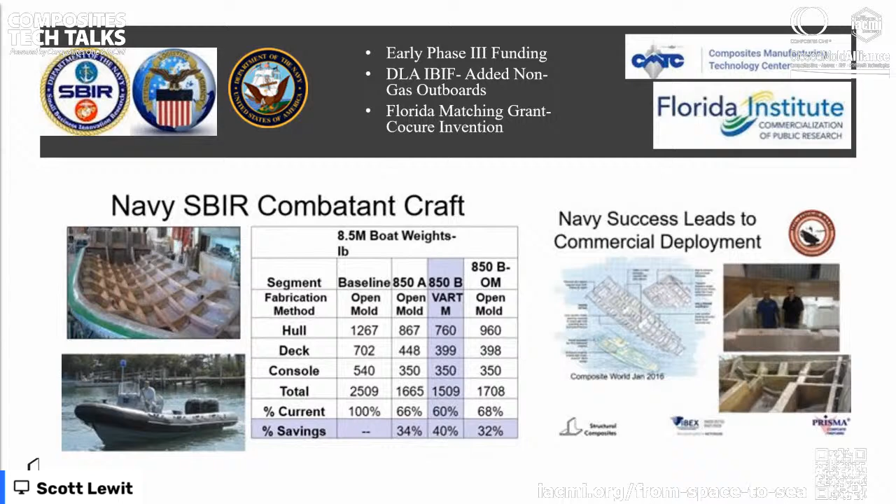So we're down this path and got fortunate — we got some money out of some Phase 3 funding right at the end of Phase 1, before we got our Phase 2, from the Navy Composites Center out here. At that time, they were just coming out with these alternate fuel outboards — early Mercury JP fuel engines. You can't have gasoline on a ship, it's too dangerous, so we'd been stuck with heavy diesels. Back in 2012, when we did this, it was the birth of the outboard heavy fuel engines that you'll later see in our RIB that we took to deployment with the Navy.

But the weight really attracted a lot of attention, and we had some early commercialization — you've seen that maybe with Hydrosport, where they took this skeleton design and used it in their 53 and 65. We didn't want to do the suspended deck on a boat that big, but we did use that skeleton design and landed a conventional stringer system on it, which made that boat very light. The Hydrosport 53 without engines weighs about the same as the 42 without engines, to give you a feel for the weight savings. And it costs more too.

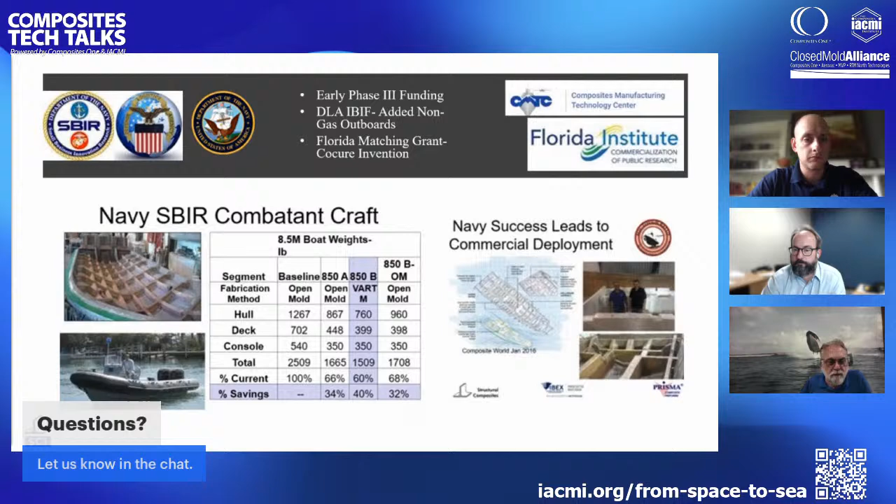So on the journey, we'll go through the inventions we made, in particular CoCure. We were able to really rack up a lot of awards, which was helpful — if you've been to the trade shows, we're there. These helped grow the buzz about the technology and started helping on another mission we've been pushing for a long time: not to be dependent on just the marine market. We want to be in other markets — it's been a long-term goal of the company, just because the boating industry's cycles are pretty deep, and I'm predicting we're probably coming into one here with gas prices where they are.

When you look at these other markets and the material acceptance — this is a little old data, from Lucintel in 2012, I think, but I don't think it's changed tremendously — the marine market is about 68% penetrated with composites, so it's a very accepted material with no barriers to its use. When you look at transportation, though, it's about 4% penetrated with composites. Construction is also about 4% penetrated. So there's very little market penetration there.

What makes this really impactful is when you look at the size of the markets. The marine market is $500 million, and that's 68% penetrated. Well, the transportation market is over 5 times the size of the marine market and only 4% penetrated. The construction market is about 7 times the size of the composite marine market and also only 4% penetrated. So it really helped us focus our mission at the company: do I want to make this 68% into 75%, or would I be better serving the world if I can make 4% into 8%?

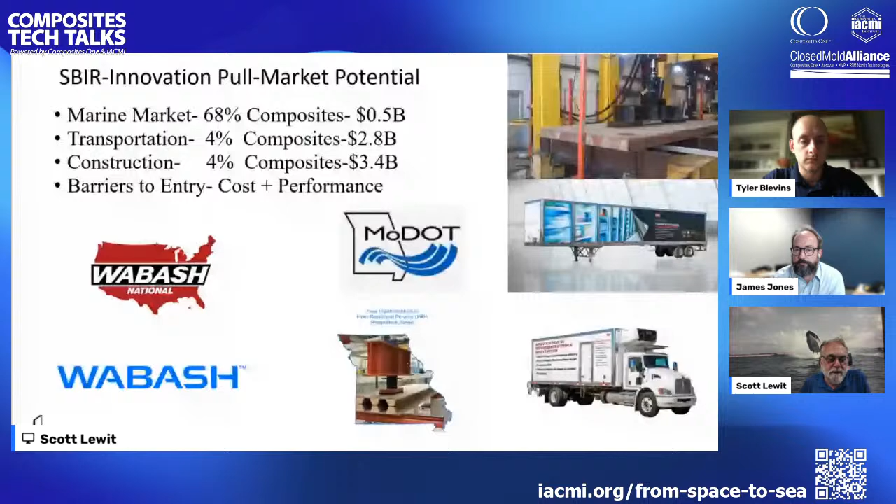So as we talk about these other markets, the kind of jive of what we're trying to do is we're trying to use the marine market as our technology development bed, and then use these bigger markets to upscale it even better and drive technology to deployment, right? And then bring it back around for the military.

As you could imagine, these are shock mitigating boats, so the boat's moving a whole bunch. There's a lot of motion. It's really like gel coat's worst nightmare. Gel coat's really brittle. Boats are designed around the gel coat. Gel coat's elongation is about 1.5%.

Our cheap resins stretch to 2.5%. Our high performance vinyl ester resins are 4 or 5%. We're not making the use of the materials that we could because of the coatings. Now you make a shock mitigating boat that flexes, and the coatings really aren't going to work.

So I started on the journey back in 2009 with this, looking at polyureas. And if you remember, we were doing something called shark skin, and I was looking at Line X, things like this to replace gel coat, and discovered its real Achilles heel is it's too flexible. And when it's so flexible like that, you get any kind of damage to it, it hydrodynamically peels.

So I was right in my phase 1 going, I got a problem. And fortunately, we had gotten some extra money from the state of Florida - they had an SBIR Plus program that gave us some extra money. And I started playing with this marriage of polyester and polyurethane, and just literally stumbled onto this compatibility that I could take certain polyurethanes and certain polyesters and just literally mix them together, and they cure into a new material. And it was really cool.

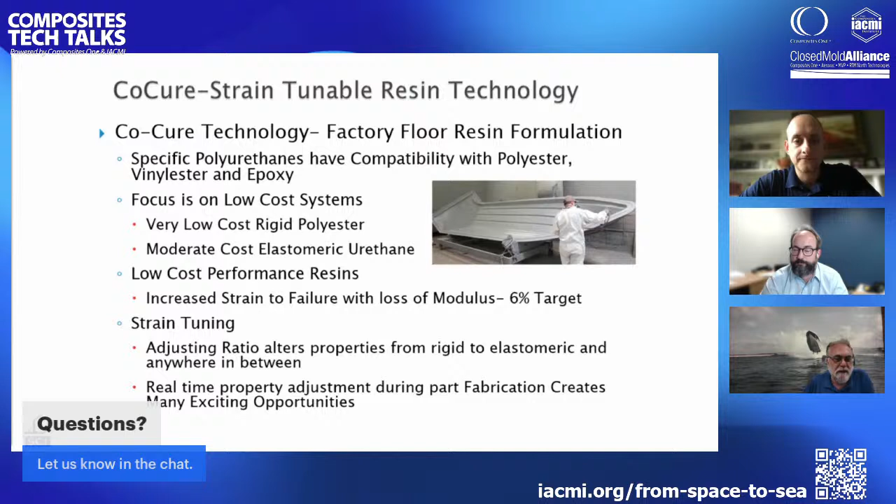So as we're doing this, Wabash is in here looking for the next big thing. And then when they kicked in for CoCure, they bought in before it was even patent pending - it's patented now. Now all of a sudden the supply chain's falling all over themselves. Okay, what can we do for you? How much can we give? So millions and millions of dollars of product development, and the result is the finished product.

There it is. So here's CoCure, and CoCure is really simple, right? It's your polyester resin, or gel coat or adhesive, whatever you want, or putty, with its catalyst, and we're combining it with the A side and a B side polyurethane. They're all optimized to work with each other. But what's amazing about this is this entire profile is possible by just the blend of these 4 chemicals.

So we're doing the chemistry, we're doing resin formulation on the factory floor and making radical changes in properties, and we're just changing ratios here. So here's the MVP gun that's set up for CoCure, and you can kind of see it's got your regular resin pump, it's got a catalyst pump, but it's got this big old slave arm system, and that's your polyurethane A and B side.

So they've now got a 4-component gun that lets us change the ratio of any of these components. When we started on our journey, it was like, oh, elongation, that's what we're after. So we learned, okay, we got stretchy urethane and rigid polyester, and if we put more stretchy stuff in, it gets stretchier. This is one of the early curves from a couple years ago.

So we're really sophisticated here. If we say CoCure 20, that's 20% urethane content, meaning 20% of the constituents are the A and B chemical. If you go to CoCure 0, that's gel coat today with about a 1.4% elongation. Nothing much happens till you get to about 15% urethane.

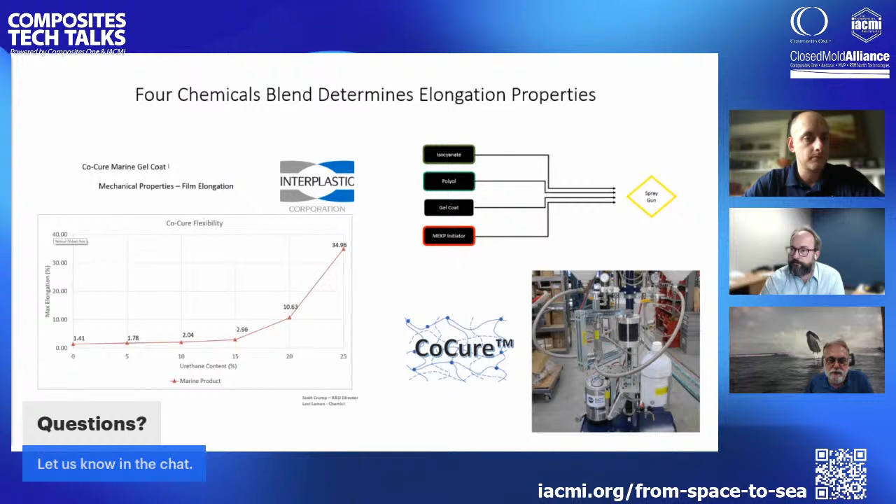While polyurethanes are really small, teeny little molecules, and they grow by chain extension. When we mix them together, we're getting this hybridization between cross-linking and chain extension. You can really see it's not linear, it's very non-linear behavior where all of a sudden it just really goes. And I didn't mention, now we're doing stuff at CoCure 50, 60, 70, and it's pretty cool. At that point, you can really feel it tactilely - it's much more elongation, up around 100% elongation.

And so what are you going to do with it? Well, like here - now if I can change my properties ply by ply or spatially in the case of a coating, do I want the same coating properties on my leading edge or my trailing edge? Do I want the same bottom properties where I'm going to run aground, or on the top? Do I want more abrasion resistance? Do I want more impact resistance? Same thing - now I can kind of dial this stuff in and out, and that's the coating side.

But then on the resin side, there's a game to be had too, because I've got glass fibers, carbon fibers, plastic fibers, and I use the same resin with all the fibers. Well, gee, maybe what if I'm changing my resin properties as I'm changing fibers? And what if I'm changing fiber location and resin properties? So you start to get the idea.

There's a lot of dimensions here that, from a science point of view, this is kind of fun, because it's like 3D chess, right? You've got a lot of new things you could do that you couldn't do before. And sometimes, especially with materials, as we talk about hybrid composites, marrying materials with really different moduluses and stiffnesses creates really good damping and noise reduction, and some opportunities in addition to lightweighting.

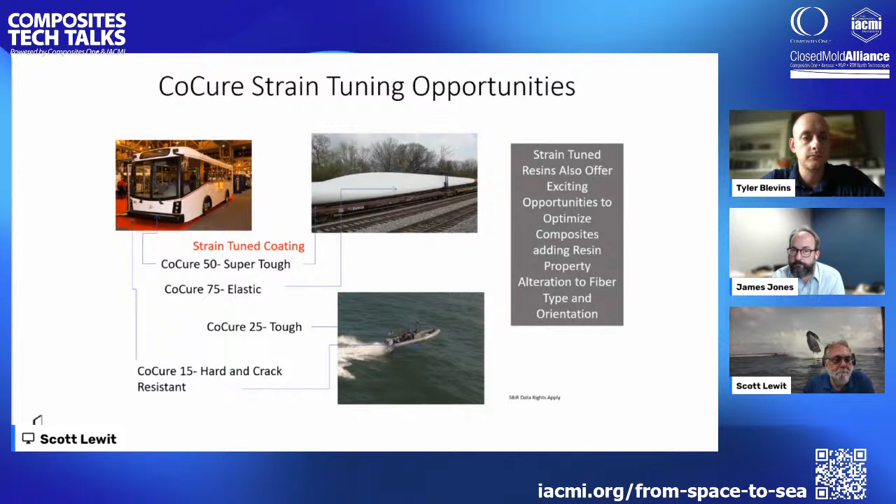Okay, and yeah, better to be lucky than smart, my lawyer always says. So it's just like, it's great - the more urethane you put in, the better the stuff gets.

This is CoCure 15, and you can see in abrasion it's about double. If I go to CoCure 50, it's 10 times the abrasion resistance of gel coat. 10 times. Okay.

CoCure 15 has about double the weathering of regular gel coat, gloss retention, color retention. And again, that goes up because you're pulling styrene out, putting polyurethane in, which doesn't weather like the styrene does. And even at CoCure 10, 15, you're a low HAP material. So it's kind of neat. It bridges the EPA guidelines.

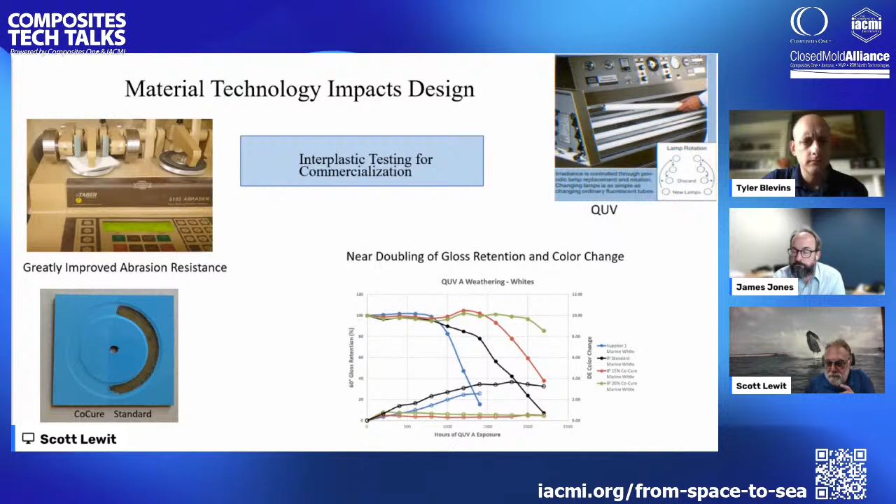The other thing we're really lucky on too is polyurethanes have, the A side is kind of nasty. The A side of polyurethanes has a lot of potential environmental health consequences. And it turns out the levels we're using, the amount of ISO, the A side, is so small that all the testing done at numerous factories now, it's undetectable. So you're getting the low HAP and you're getting low ISO. That was really fortunate for us.

Okay, so at the seminar I'm going to talk a little more about business models, so I'll leave a bit of that for the session. But I wasn't happy with the business model, so we created our own business model, and we'll talk about it. It's a technology sharing model, and Wabash is a part of that.

Without getting too much into it, Wabash joined the company, became equity partners, and now technology we develop only can go to them. They are exclusive in their market segment. We can't deliver our technology to anybody else. But as we develop technology together, we're free to take the technology to other non-reserve markets.

And so there's this whole new story of technology sharing, technology collaboration. A good example are the aerospace companies. Boeing's got a lot of patents, Lockheed's got a lot of patents, and Boeing's patents are to keep Lockheed from doing stuff, and Lockheed's patents are to keep Boeing from doing stuff. But if I could take a Boeing patent and make a semi-trailer 30% more aerodynamic, does Boeing care?

So there's all this IP that's defensive IP, and if we could figure out how to tap it, it could do good not only for the company, but for a lot of other things, good for our country. So in the business model, I stole a lot from the Navy Composite Center, which I've been working with for 25 years, in their collaboration models.

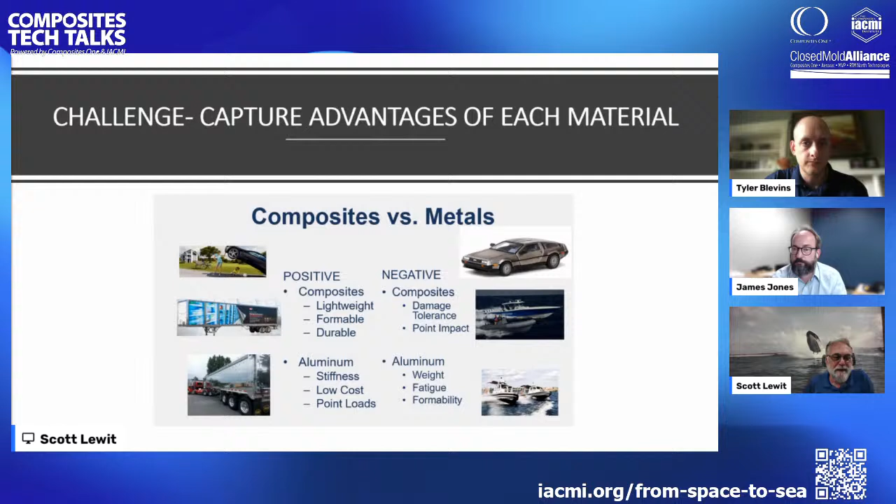And we made a discovery again with CoCure. What we're trying to do is get rid of the negatives of each material and stress the positives. We discovered that the CoCure, by changing that formulation again, we can change it from a coating to an adhesive. And by making it change from not stick to stick, it can really stick.

So we can spray it right onto metal surfaces, just like we'd spray gel coat, but now it's an adhesive coating. We spray it on the metal, and then just like laminating to gel coat, you laminate on the metal. That's it. It's just that simple.

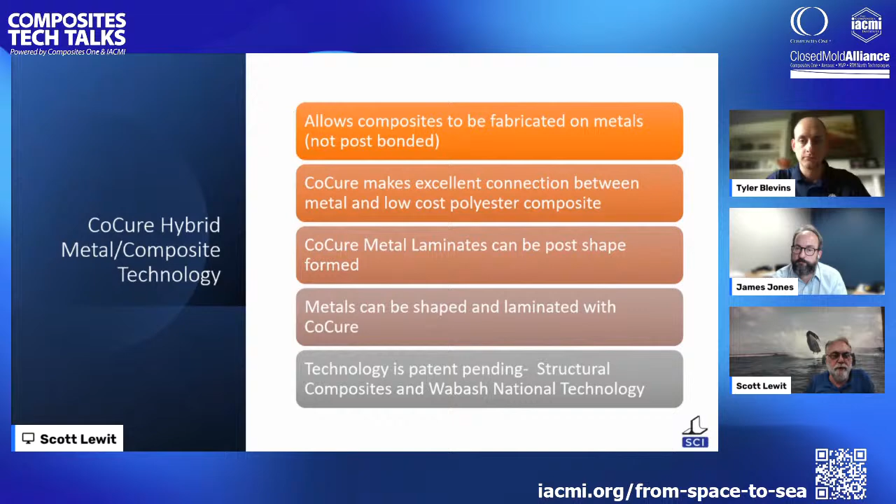You can kind of see here some of the first pieces we made. This was with a methacrylate, it popped off. This is the hybrid metal one, and it bent - it took shape. And we went, oh. Me and Travis from Wabash, we were doing the Snoopy dance, because it was like, wow, automotive.

We could stamp this stuff out. We're going to change the world.

This is what we needed for Wabash too, because metals give a lot of toughness. They give a lot of point load. They give a lot of modulus. Modulus stiffness is expensive for composites. Glass is not a stiff material. Carbon's a very stiff material, but it's 10, 20 times the cost of glass.

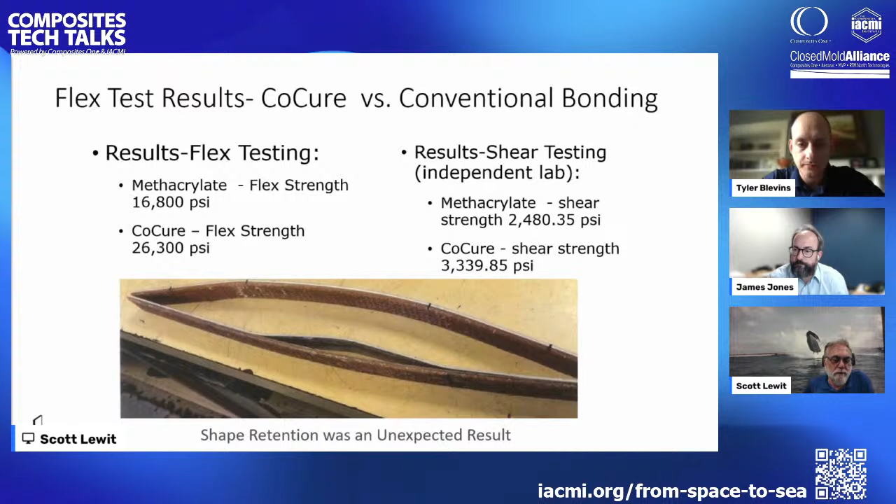Aluminum, we can buy at $2 a pound, and it's got a 10 million modulus. So we can use aluminum just for its stiffness. We can use it to replace things like carbon and be very cost effective. In this case, we're doing semi-trailer floors. So in Wabash's rapid innovation process, we went in about 7 months from idea to deployment.

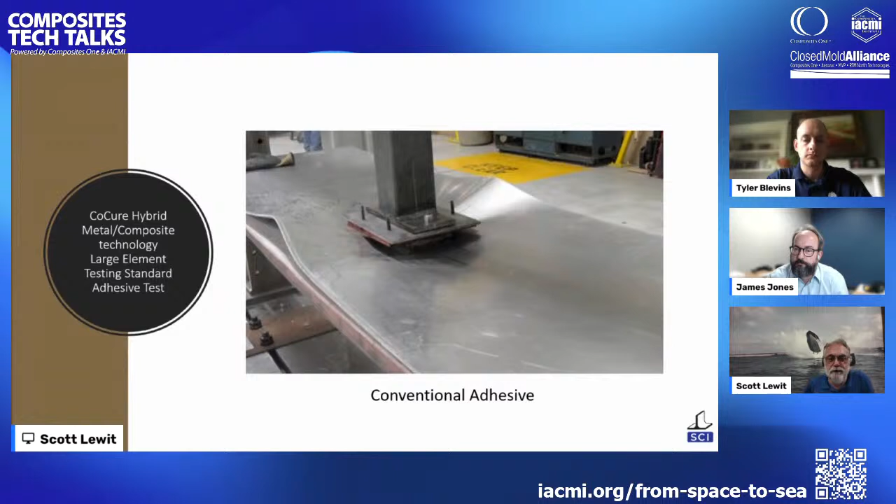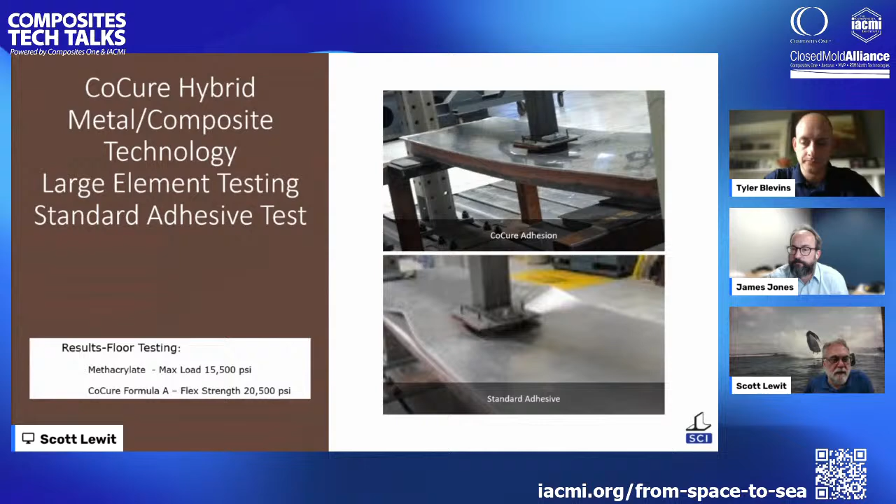Here you'll see larger scale tests we did on a floor section with conventional adhesive, and then with CoCure, we're punching through it and getting better loads. From there, we got permission to build a prototype, which they full scale tested. This is something they would never, ever do before: pick an unmanufactured floor up by the ends. This was amazing to them, that it wouldn't just buckle without the walls sitting there.

Hey Scott, so I got a question that we've got presented to us. As a reinforcement resin, are the processing properties, gel time, viscosity, et cetera, suitable for LRTM, infusion, and other processes? Absolutely. Yes. Awesome.

So, yeah, it's probably the one challenge with CoCure: if you need a really long gel time, you tend to get pushed to the aliphatics. The aromatics tend to go faster, so if it's fast, we can put you in that. If you need a really long gel time, the aliphatics give you the time. It's just they're so much more expensive, the aliphatics are so much more expensive. But yes, absolutely, pretty much.

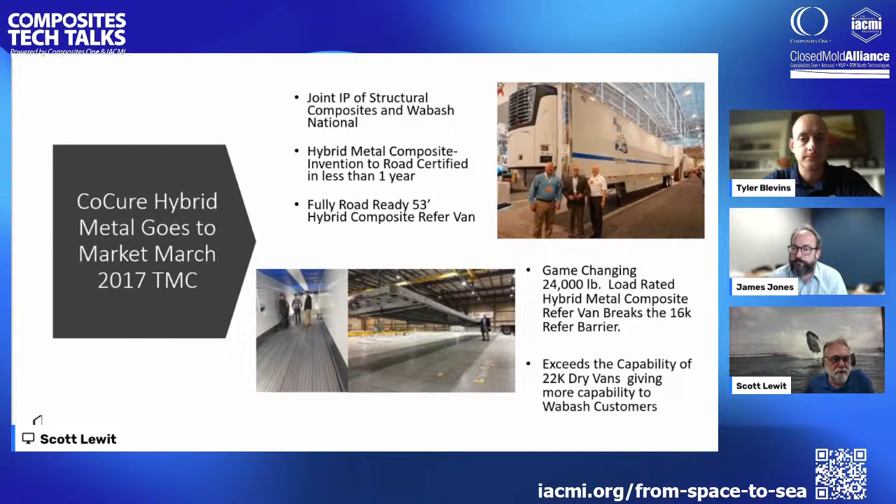As you'll see now, that's where I'm doing another SBIR, we're actually pushing that, I'll talk briefly about it here. So here we go. We got this money, Wabash came along, came commercial. We've been plugging for Rapid Innovation Fund, they get 2,000 white papers, they fund 11 projects. Okay, so the third time I finally hit it. I came back and we had gotten far enough and we won on the third one. Well, it's because we'd come a long way with CoCure and everything else, and we had commercial products. We had a good story.

We married the CoCure technology to the emerging outboard engines, which the Navy is really keen on. So we had Mercury, Evinrude, Cox, OXE engines from all over the country, marrying them up on the boats. And this is a great contract. So we built boats, instrumented them, built them at the OEMs that are making it. We built boats at Brunswick, at Zodiac, at Willard, at United States Marine. We're going to the supply chain the Navy uses so that they can pick it up and deploy it. Then we'd instrument it, test it, and deliver it to the Navy.

So the point of this is this leveraging between the two is very, very powerful. I think it's good for both the commercial side and the government side, because with the government, we don't have the volumes we need to push cool innovations. And then once this becomes commercial, now it becomes deployable and affordable for the government to be able to buy it, and it's out there.

In fact, the things that happened between 2012 and here is interesting. In 2012, we didn't have digital control. And that first boat I built, I loved it because it would go 72 miles an hour. But the Navy didn't like that at all. The problem is if you got 2 guys in the boat, it goes 72 miles an hour. If you put 25 guys in gear, it goes 40 miles an hour. So it's not really a good solution to that until today with digital control.

So this boat at 50 miles an hour, that's it. It uses speed and they set the digital parameters. So if it's two guys in it, that's happening at half throttle, and if it's full loaded, you get more throttle. So that technology really helps improve the safety, because we took that first boat out and let the guys try it, and every single one just wanted to see how fast they could go, without fear. So it was pretty, with a great grin on their face, of course. I bet.

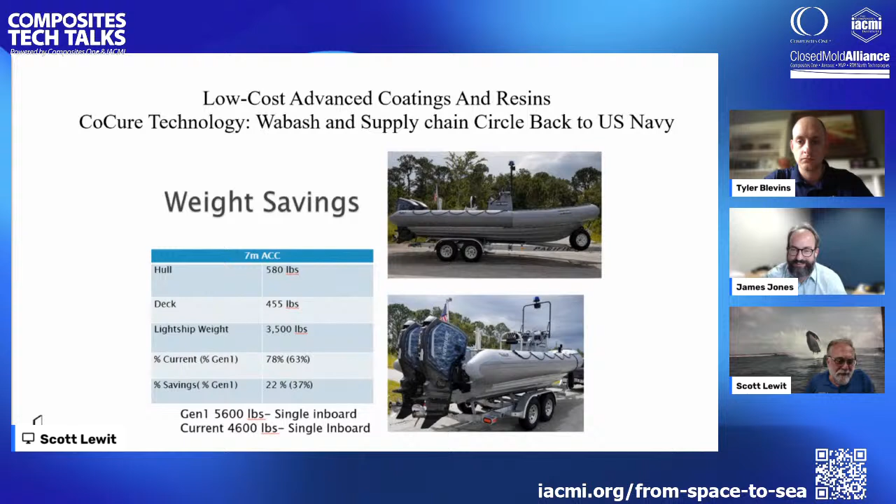Using that model, you might have seen at CAMX, we did a 53-foot reefer van. This uses the CoCure technology we developed with from the Navy, now with Wabash enhanced. It's a metal hybrid.

Now really thrusting us into rail. We have a lot of rail projects that are going to be on the horizon, working with Trinity as our partner in rail. So we have a similar arrangement with them, working with Trinity on an exclusive basis.

And then we won another SBIR. We won this last year, titled Game-Changing CoCure Coating Resin and Adhesive Technology for Automotive. We're teamed with Ford, and we're in the phase 1 process now, getting some really nice results. It's like my little metal piece, I got metal shapeable composites. You'll be seeing things you could form with metals that are really cool. We're really excited about it, and we'll be writing our phase 2 proposal, going into the next cycle next year, trying to get $1 million there.

And if you didn't see it, the CoCure also impacted our work in infrastructure. We've been working composites and infrastructure since we started, almost in 2000. It's always been a lot of challenges with price acceptance and materials, but we've stuck with it. We believed it's going to happen. And CoCure's economics really helped the bridge project.

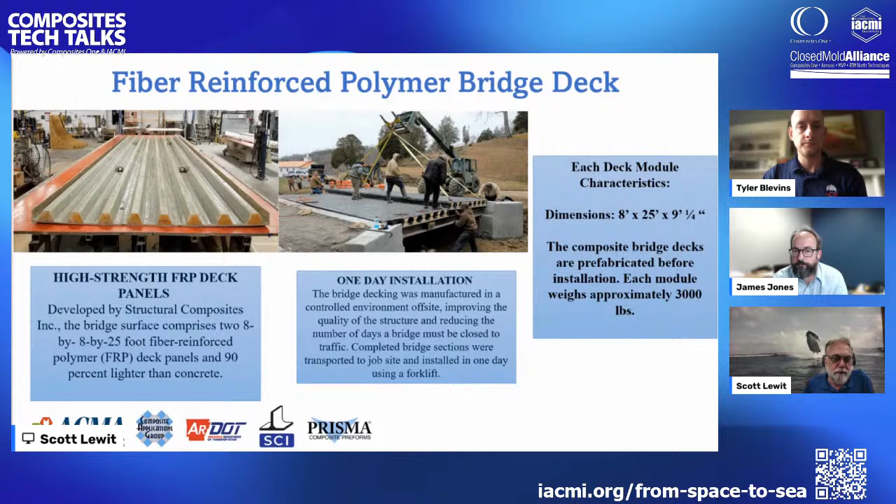And the need for small community bridges is off the charts. There are many, many bridges right there in that area of Tennessee that when you're just driving over them and you look at pictures from underneath, you go, oh no, this ain't good. The community we did this with wants a bunch more. Georgia wants some. So we're figuring out how to move to the next stages and the right partners to start growing this. But we really want this to be part of the infrastructure solution, which would be great.

And putting the smart structures and sensors in there really helps. You can go on that website and watch live, 24/7, a live feed. As vehicles are going over, all those sensors are reading.

Here's the chancellor speaking of why we need brilliant engineers, future brilliant engineers, all the students who are part of this, to make life and lives better.

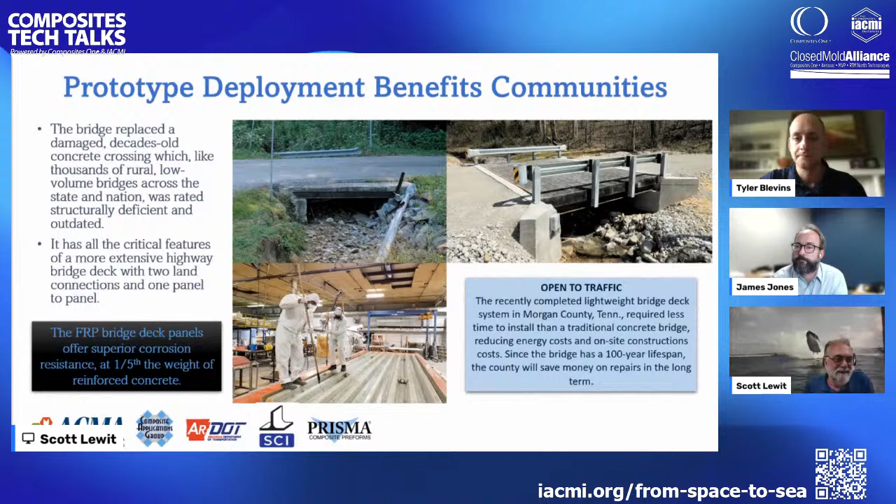So you can kind of see the before and after here. One of the neat things about this bridge deck approach is you can make it with a whole bunch of manufacturing processes—open mold, closed mold, high volume, low volume. For this one, we just did a wet layup, which made it really easy and built it real quick, and it's been in there for over a year now, doing really good.

So, hopefully it won't end. That's our mission, what I'm trying to do here in the company. Been at it for a while. We're working hard on succession, next generation, but we really want to be a technology feed for the country, for the world, continuing to generate technology. We've got a good model.

We're not going to scale these up. Why would we do that? We let our partners do the scale up, and we do the technology. I think that marriage is working really good, and it works to the benefit of everybody—it lets us do what we're good at, and it lets them do what they're good at.

So with that, I'll take any questions.